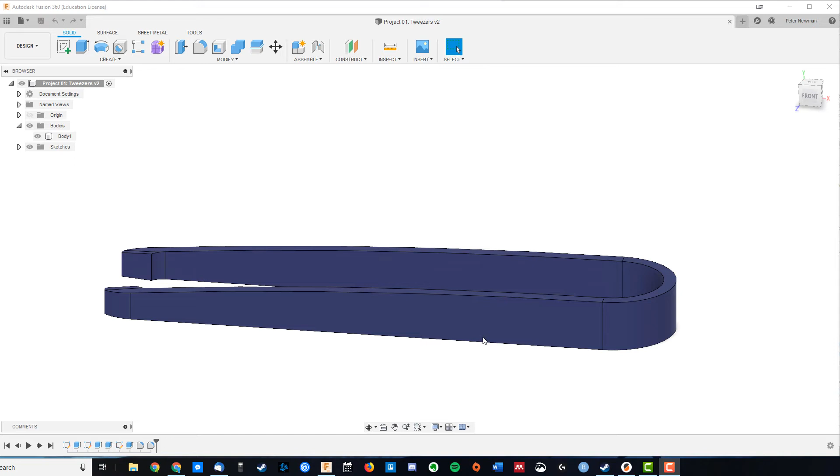Okay, so we're going to get into our first project. We're going to be designing some tweezers. This is a great project because it's going to take us through some of those basic tools that we're going to use time and time again.

So the first thing to know is that just navigating around, using that middle mouse button, you can move around, but if you want to pan or orbit, hold in Shift to move that around like that.

Okay, so we're going to start with making a new design, and the best thing to do straight away is to save it, so Control S. And we're going to save that as Tweezers prototype, something like that. And that means that Fusion 360 can immediately start auto-saving, so that if it does crash, which it does from time to time, you don't lose everything.

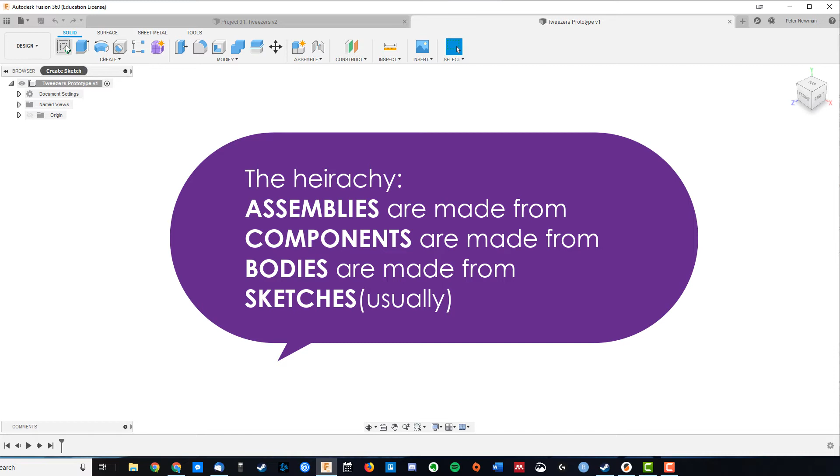So, the basic workflow is always that you go from a sketch into bodies. So we're going to start with drawing a sketch. Most of my sketch tools are in this menu here. We're going to choose a plane, and see we've got this cube at the top here that tells us where we're looking. So let's choose that bottom plane there. We're looking at it from the top down, and I'm now inside a sketch, right? And you'll always know because you've got this green tick in the corner here.

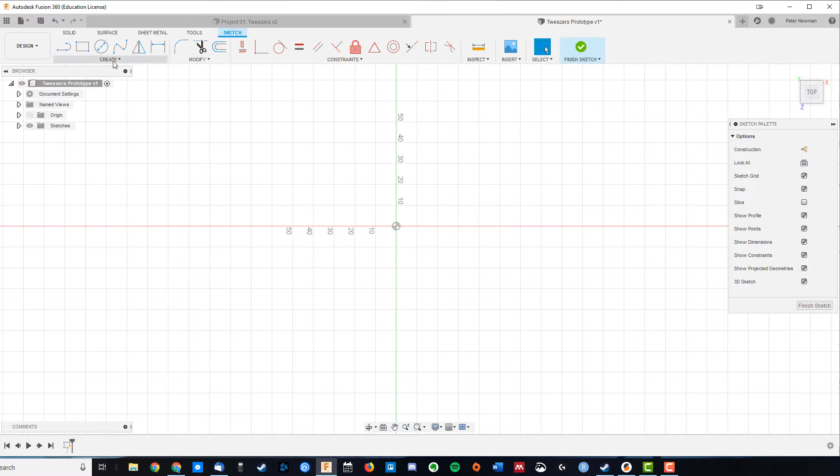So we're going to start with creating the outline of our tweezers, and for this I want a center rectangle. You can see you've got all these different options, and those options even tell you how to use them. So a center rectangle, we're going to choose the center point, and already I've got a couple of dialog boxes. These are our dimensions. I want 20mm by 80mm. You just type them in, hit enter.

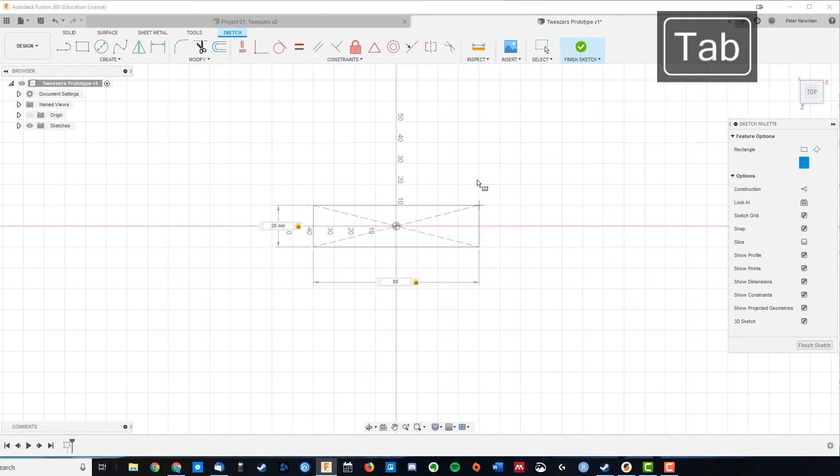And now we've got an enclosed shape, you know, because you've got yellow on the inside, and we've got our line around the outside. These lines here are construction lines. They're going to be really helpful later for specifying geometry without it actually being part of the design.

So if that's the outline, we need the curve because we're going to use the flexibility of that PLA plastic to allow us to squeeze these tweezers shut. So I'm going to come across to arc, and what I want is a 3-point arc. You can see you start to snap to different parts of the grid. So snapping to that corner, and as I bring it out, it even snaps to when it's a half circle.

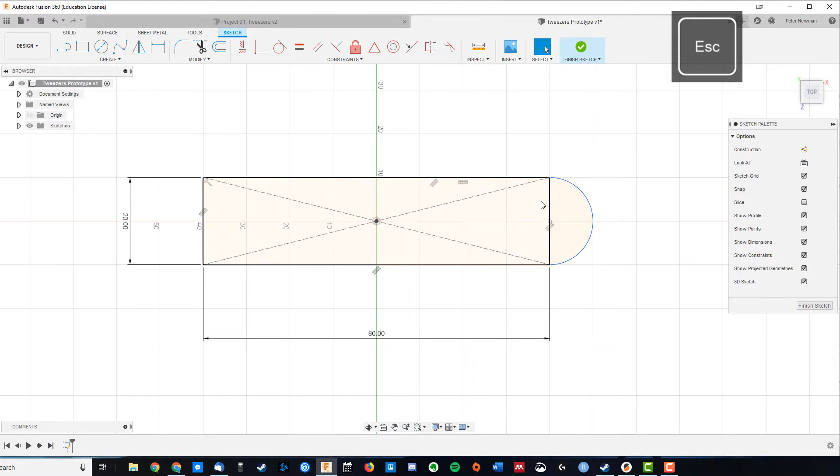Now, at the moment, I've got two different shapes. Now, I don't want to just bring out this whole block. I want to add some thickness to the arms. So what I'm going to do is use an offset. All right, so we're going to trace all the way around, but the fact that we have two different shapes is a bit of a problem because offsets only work on the one shape. So to get rid of that line, I can either make it into a construction line, or I can come up here for trim, and the shortcut for that is T. And that allows me to remove that geometry, which means that, again, we now have one big shape.

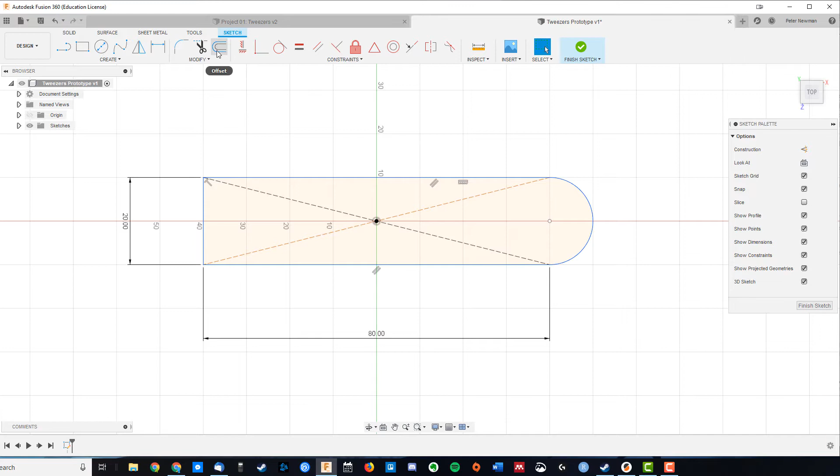So, using our offset tool, this is one we'll use all the time, O for offset, and now you can see you can add some thickness, and it's offset of -2, the minus is just telling you the direction, and now we've got our outline. What's really handy is that if we change these dimensions, that offset will still remain at 2mm.

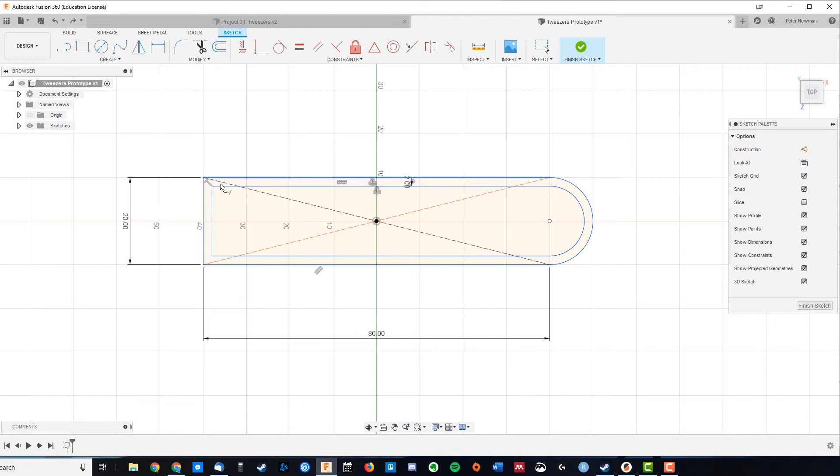Now I don't want these connected at the end, so to close those off, I could use the line tool, but I can also come up to modify and click extend. And now you can see it extends that line to the nearest line. And again, I want to trim those out, T for trim, and now we've got white space, which tells us that it's no longer part of our sketch.

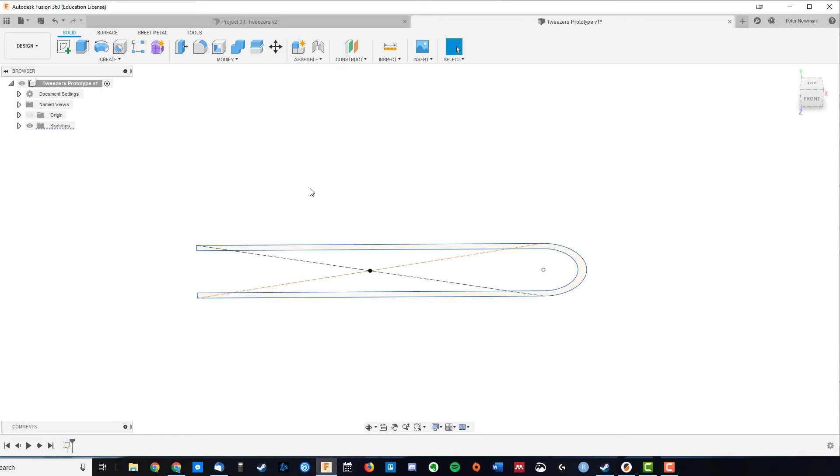So if I finish the sketch at this point, I've just got this drawing, it's on the bottom plane, and now we get to see how you create three-dimensional bodies. So you come up here, create, extrude, and again, this is a really common one, so it's good to give it its own shortcut, which is E. We've got lots of different options over here, but what we want is to bring that up to, let's say, 8mm.

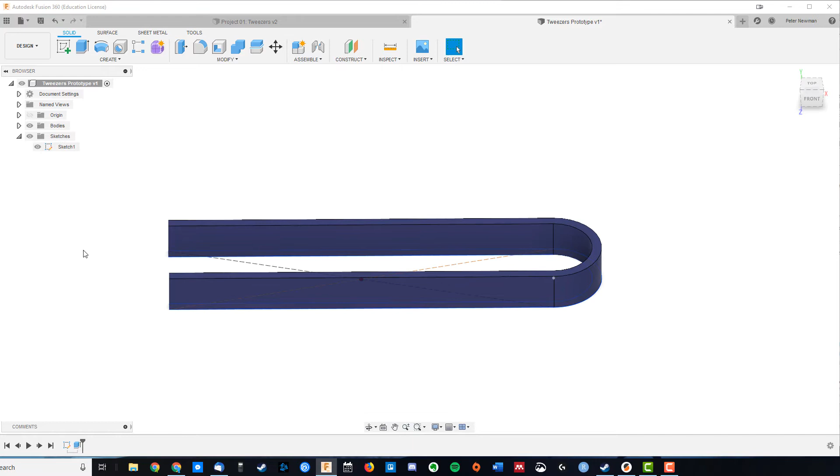Awesome. The sketch is hidden. There's the profile still underneath. Turn off the bodies, and we can see where our body is coming from. From sketches, we create bodies. Bodies we can organize into components, and components can be assembled together, and we'll see how to do that a little bit later.

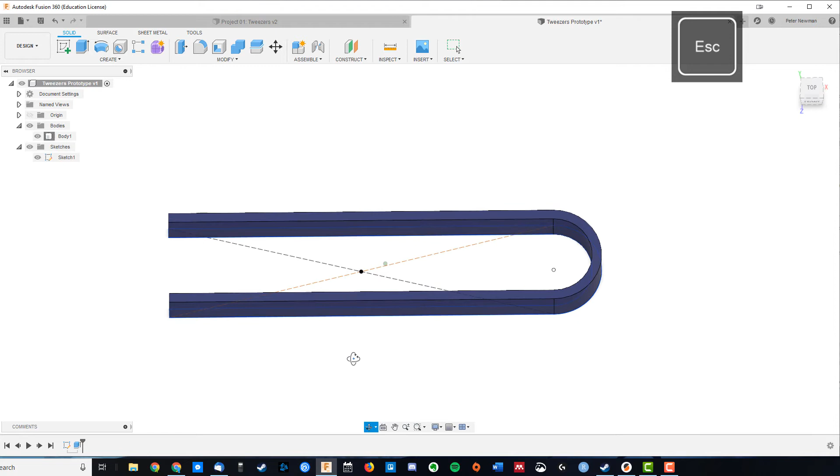Now, at the moment, my tweezers are meeting awkwardly at the corners. What's fantastic about Fusion 360 is that we don't have to start over because we forgot some feature. We've got this timeline down the bottom here. We're going to go back into my sketch here. So I'm going to right click on it, edit sketch, and as I make changes, they will propagate through my design as much as possible.

Now, one thing we always want to do is make sure we're nice and zoomed in so we can see what we're doing. And what I want to do is just add a construction line 5mm from the end here. So I'm going to hit L for line, and then if I want to make it a construction line, I can click over here or hit X. Right, so X toggles it on and off.

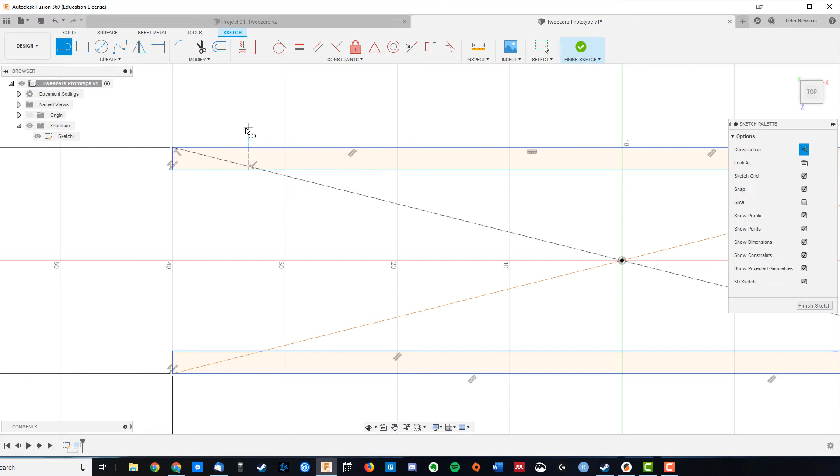And I'm going to draw a line top to bottom. You can see it snaps to 90 degrees. And before we actually wrote in the dimensions, this time I can put them in after the fact. So here's sketch dimension, or D. Click on the point, and I can set that to 5mm.

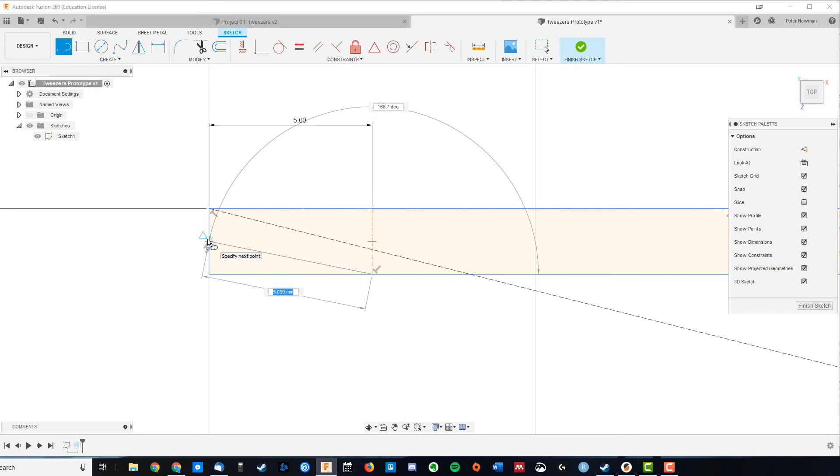Right, now I want to add a line. I do want this to be part of my sketch, so I'm going to hit X to turn off the construction line, zoom right in. I'm going to start from the bottom of my construction line and come over somewhere to the edge here. You can see if I go to the middle, I get this triangle. That tells me I'm at the center point of that line.

I want to come down a little bit because what I'm about to do is hit D for a dimension, select both of these lines, and now I can actually put in and specify an angle. I want 5 degrees. Right, now I don't want these parts to my design, so hitting T for trim, I'll trim those away.

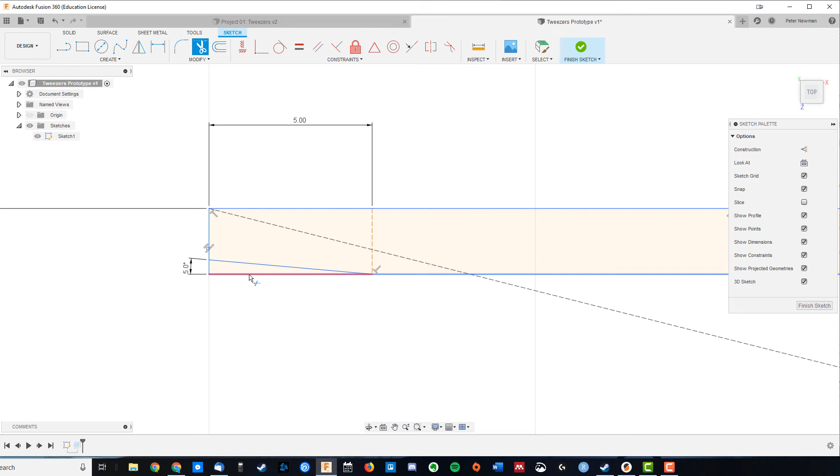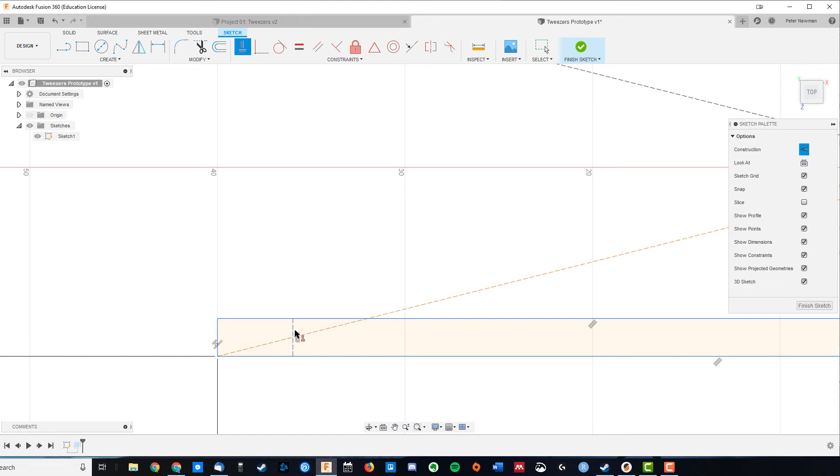Right, coming down to the bottom, do the same sort of thing, but let's say I've accidentally put in, again, one construction line, put in a diagonal line. We've got all these constraints here. Right, so rather than drawing it again, what I can do is hit horizontal/vertical, come over here to our line, and now that's locked to being always horizontal or vertical, and it will go to the nearest of the two.

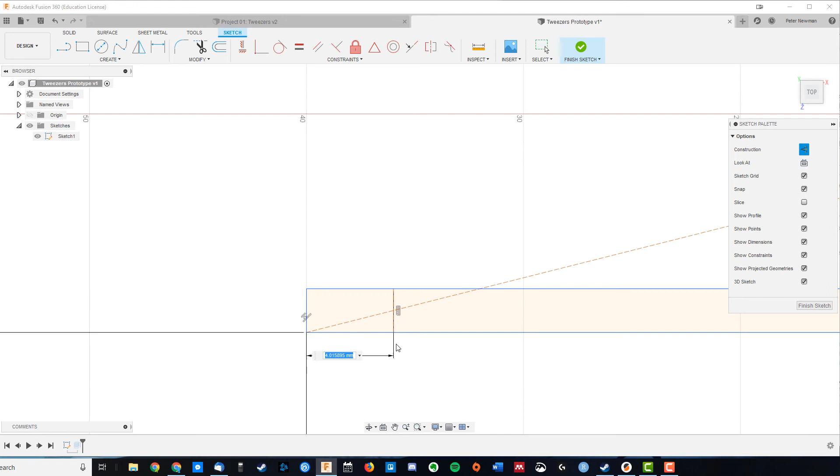Constraints can be really helpful, especially for finding tangents, but Fusion 360 is smart enough to snap a lot of them in, and you'll just recognize over time what some of these symbols mean. So again, hitting D for dimension, and I'll make that 5mm, and again, come over here.

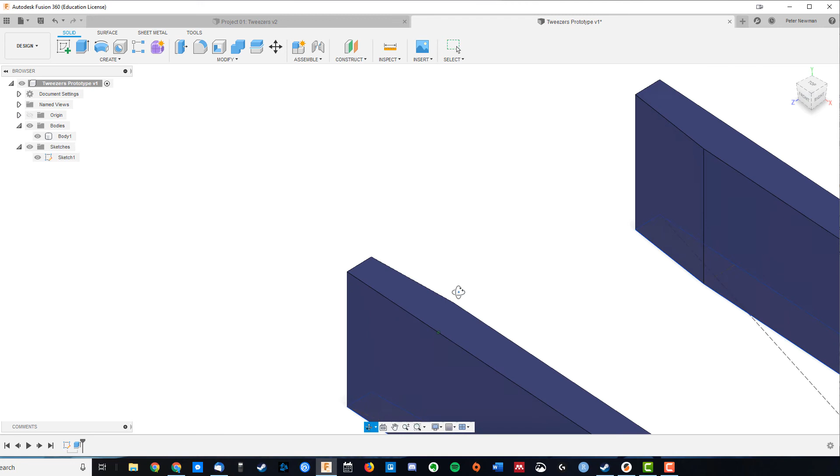It's a construction line, it's dotted, so hitting X to change that again, and D for dimension to get 5 degrees. Trim, finish sketch, and you can see it's actually updated into our 3-dimensional model. It's really handy. Right, so heading back to our home view, there it is.

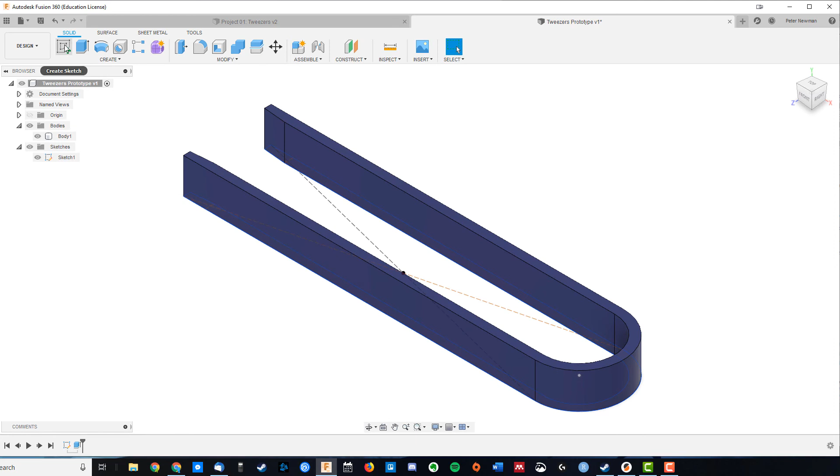Now in my original design, we had this interesting tapered edge here. So to do that, we're going to come over here and we're going to create a new sketch. It's quite a common thing to do, that we're going to create multiple sketches in the one design. Over to my tweezers, what I want to do is actually draw a new sketch on this plane here. So we're going to create sketch, and we can specify that it's on that side.

We actually want to use the geometry of this shape. I want to go from this top corner to over here somewhere. But at the moment, it's not actually part of my sketch. So what I want to do is come over here to create, and we're actually going to project that geometry into our design, or P for project.

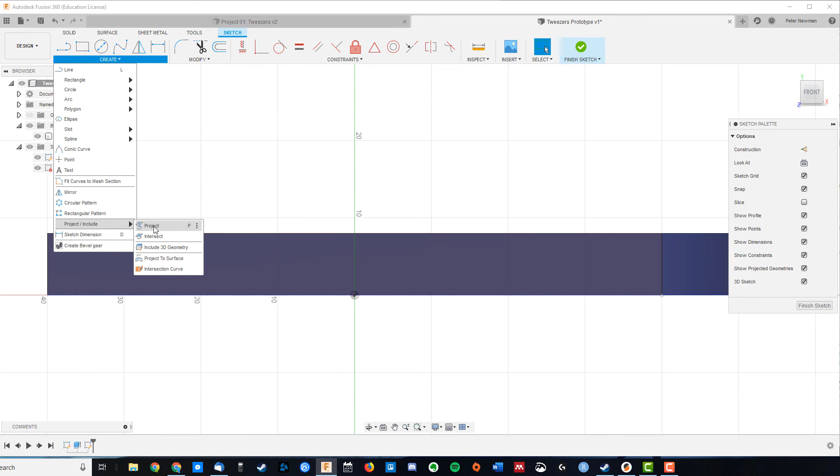Now we've got the whole body, or we just want certain parts of it. So I want this line, this line, this line, and you go OK. And now when I turn off the bodies, these are very firmly part of my sketch. We're going to put in a nice arc. So 3-point arc, come over to maybe halfway, and again I'm waiting for that to snap. Yes, there it is, a tangent line symbol. So we've got this nice smooth transition down.

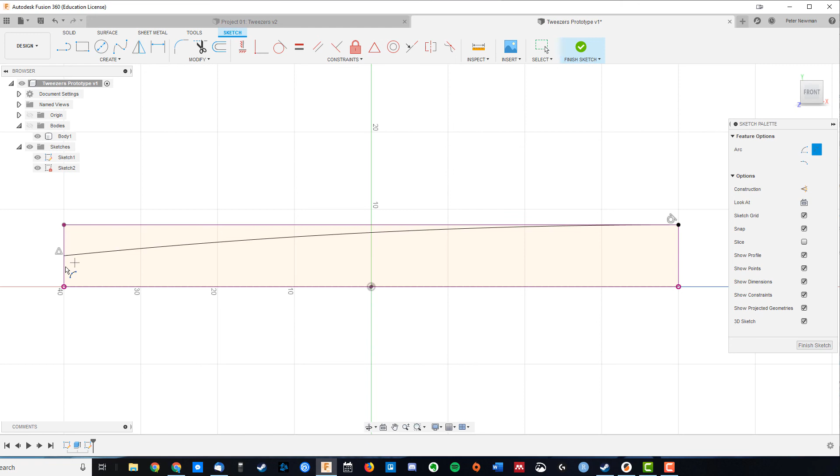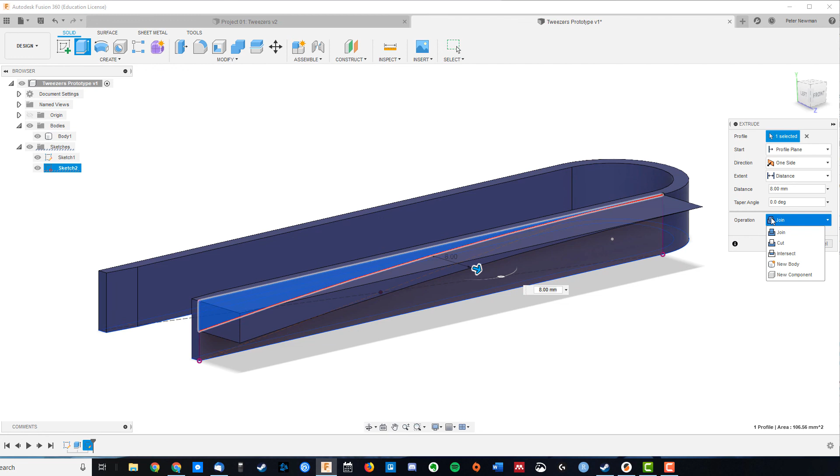Finish that sketch, and what's great is that now you can see how the sketch is still on the side. We can actually extrude, E for extrude, that profile through the design, and it trims out. So going the other way, we get join. We've got a few different operations that we can use, but we want cut. So go OK, and now I've got this lovely taper.

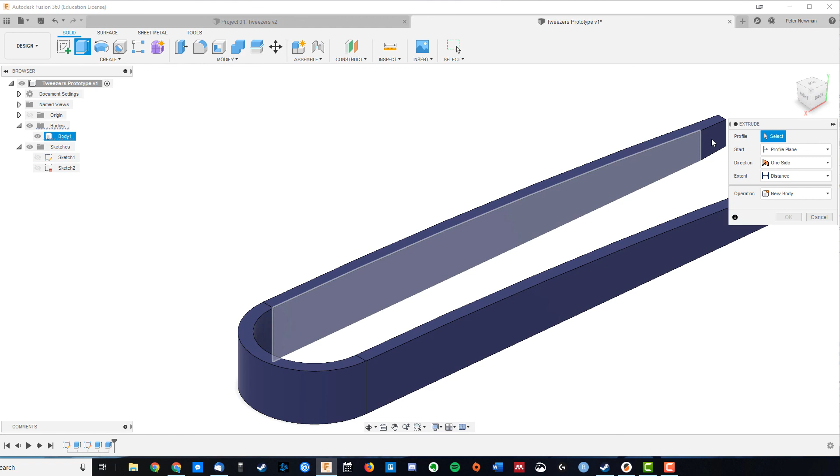Beautiful. Now the final step is to add some little pads for our tweezers to grip with. E for extrude, and we're going to go 1mm. And orbiting around, we're going to go E for extrude, 1mm. Awesome. The last step is now we've got our lovely 3D design, we can start modifying it to make it a bit more pleasing, a bit stronger.

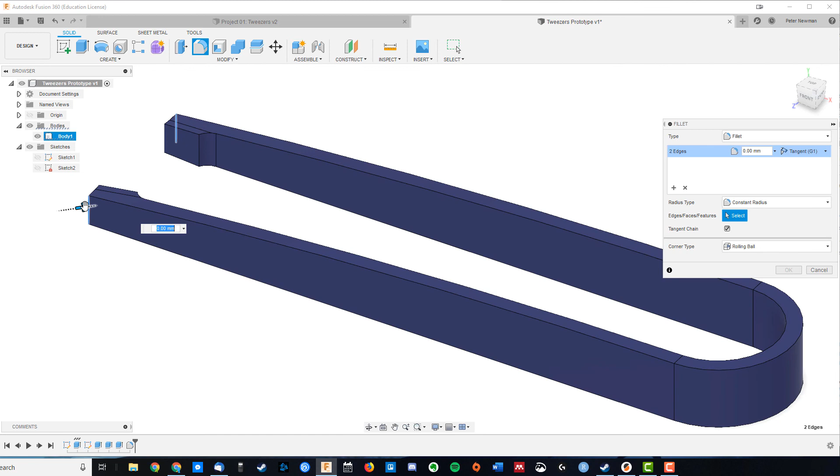So we can go modify, and we're actually going to add a fillet. You can see how the fillets work there. And I'm going to select that edge there, and notice that it actually works out what I'm trying to do, and we'll select that edge there, and we can bring it out. So we add a bit of strength, a bit of pizzazz, F for fillet, and now we'll just set that to 5mm. Okay. And with that, you've created your first project.